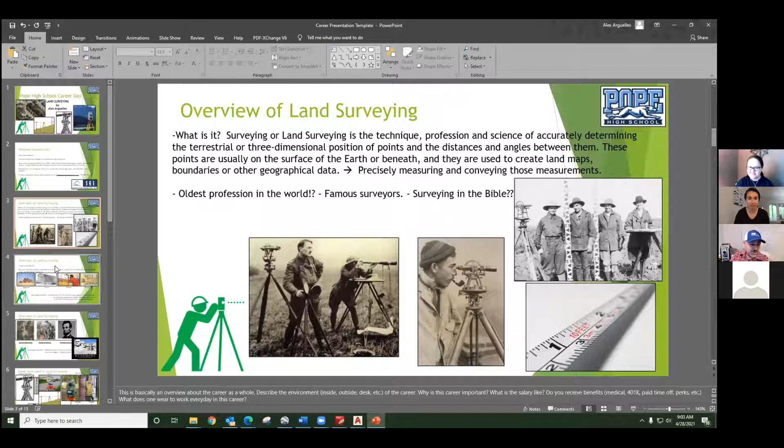So a few things about land surveying. We would consider it the oldest profession in the world, and of course there's going to be debate about that, but we'll stand by that. I'm going to share a little bit about a few famous surveyors, and then something about surveying in the Bible, believe it or not. So yes, land surveying is the oldest profession. We know many past civilizations have used it, everything from the pyramids to great structures from the Greeks and others.

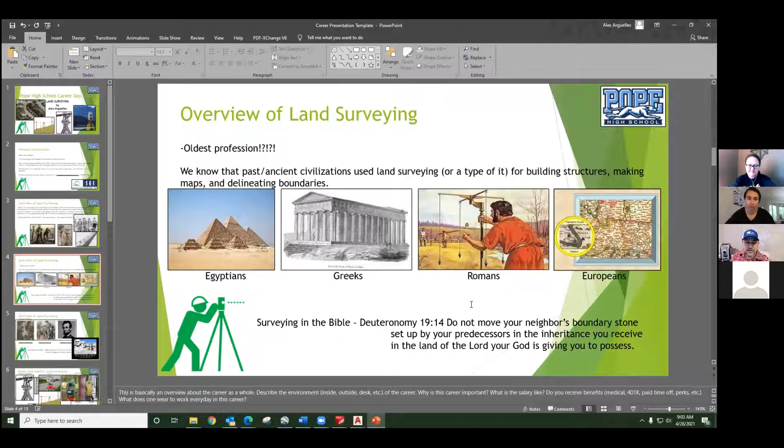And then surveying in the Bible: 'Do not move your neighbor's boundary stone set up by your predecessors in the inheritance you receive in the land the Lord your God is giving you to possess.' So land surveying has been around for a really long time.

Another verse from the Bible: 'Cursed is he who moves his neighbor's boundary stone.' So again, the word surveying is not in the Bible, but it's understood that there were properties, that there were boundaries, and that they found it important not to mess with those things. Even nowadays it's the same thing - when you have a property owned by somebody, you would not want anybody moving your property corner over, causing you to lose area.

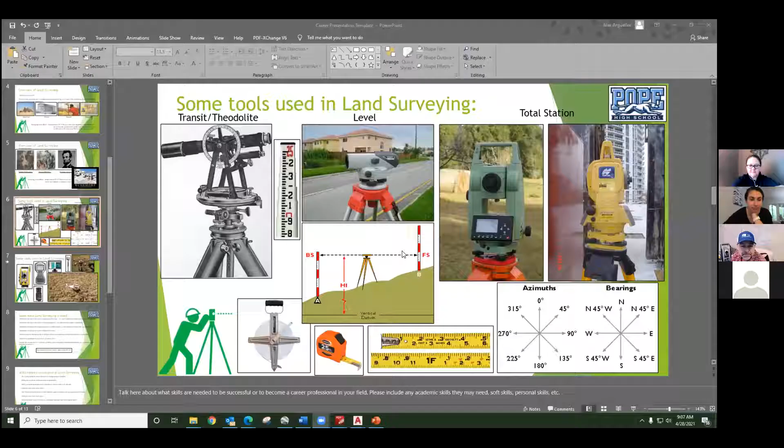But you describe the shot that you're taking. So I could be taking the center of a manhole. I could be taking the edge of pavement. I could be taking the edge of a driveway. Each of those things, as I'm shooting them and locating their location, if I put the right description, then later when I come into the office and I download the information, I can create a map, and it's really easy. It creates a sketch of everything that I'm locating, and I'll show you that in a bit.

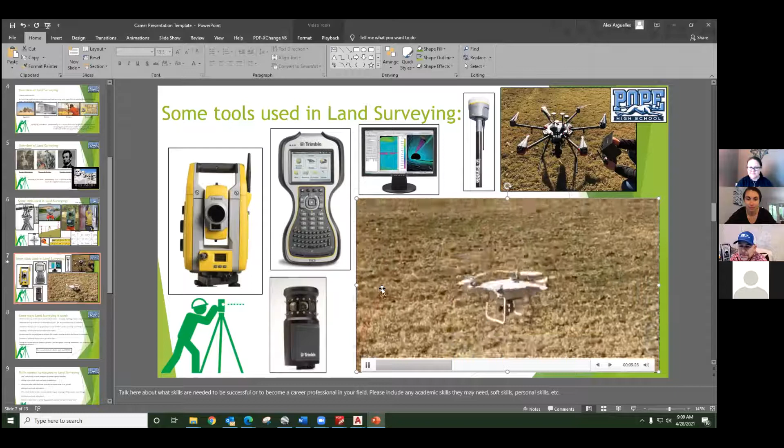Nowadays, we also use drones a lot. The drones that we use are for various purposes. The one that you're seeing there in the video, it's a drone for photography. So that one will take aerial photography, and then we can bring it into our drawing, and we can have a background of it. And again, I'll show you that in a bit.

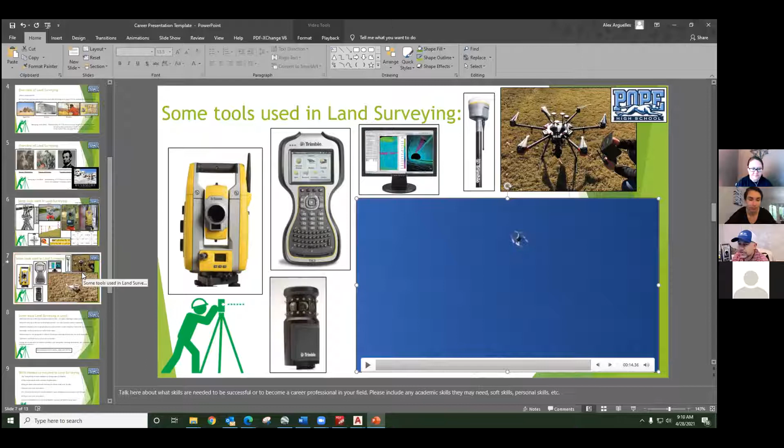This other drone here has a LiDAR unit. LiDAR is laser and light that shoots down to the earth, and you can get the topography of the earth. And again, I'll show you that in a bit. But as you can see, we've come a long way in land surveying, and technology is a huge part of it.

Usually land surveyors are the first ones to step on a site. We'll go through wooded areas and gain information about the lay of the land, where there's creeks, ditches, lakes, other structures, old structures. We have to locate all of that and show it, so that when there's going to be development or somebody's going to buy the land, they know what's in it.

We determine the lay of the land in developed sectors. For example, if you want to add an addition to your house, you need to know where the boundaries are and what the county permits, how far the county will allow you to build. Or if there's a subdivision already built but they want to expand into an undeveloped area, we go in there and locate all that information.

We delineate boundary lines, graphically or written, to define private property, easements, and other areas. If you own your own home, that is your private property, and it'll usually have pins at the edges of the property. You connect those pins by invisible lines, and that defines your property. We do a lot of boundary surveys, which is a clear delineation between you and your neighbor, and you and the public right-of-way. Usually cities and counties own the road. I'll explain easements in a moment.

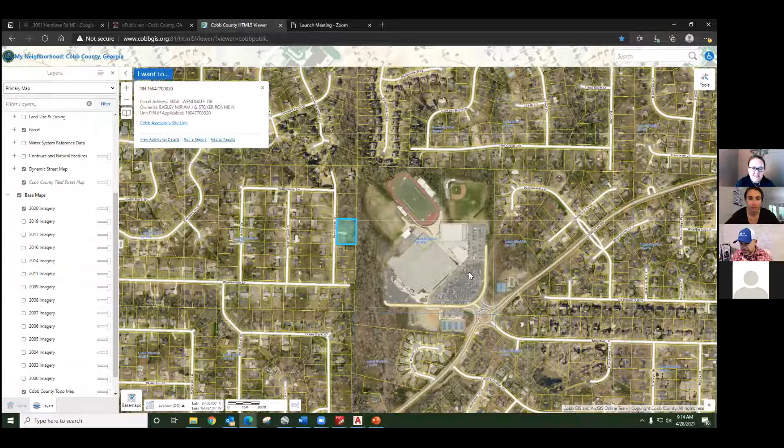The way the land system is divided in Georgia is called land lots. Imagine huge squares, then smaller squares, then smaller squares—that's how we define the location of something. For example, your school is located in land lot 476 of the 16th district of the 2nd section in Cobb County, Georgia. So this is land lot 476, this is the district, and a much bigger square would be the 2nd section.

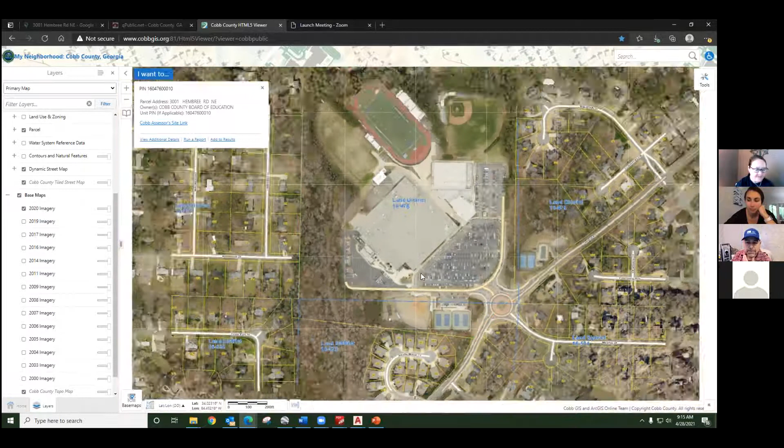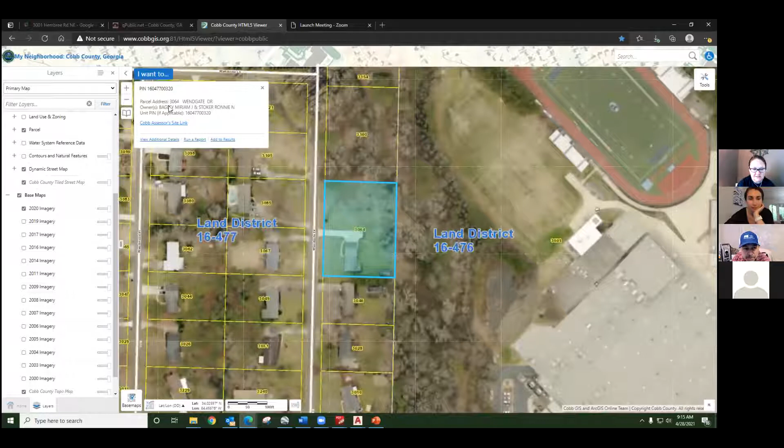What you see there in blue is pretty much the boundary of your school. As you can see, it falls in land lot 476, part of it falls in land lot 532, and part of it falls in land lot 533. This is important because this property is owned by Cobb County Board of Education. But next door, this house, for example, is owned by another individual. This is all public information, by the way.

With a little bit of research, you can find documentation that says who owns it, when it was purchased, and often you can find metes and bounds, or you can find a plat.

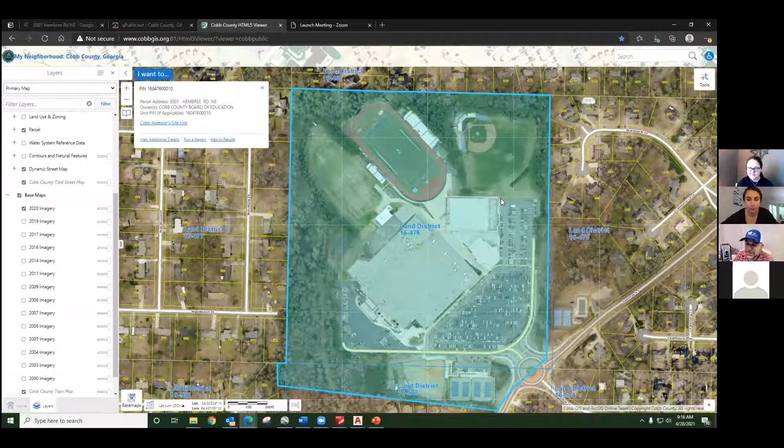Let me explain what metes and bounds are. If I were to describe this property, maybe I start over at this corner and describe a certain bearing and distance. Then I describe another bearing and distance all the way around and make sure that there's closure. That would be a metes and bounds description of your school property.

Also, of course, there's plats. Plats are like maps, so it's more of a visual sketch, and I will be showing you that.

So here, let's share this. This is the entrance to your school. And this specific plan, or sketch, that you see here is an egress, ingress, easement.

So what that means is that when a utility gets permission from a private property, which in this case is your school, T-Mobile South got permission to have an easement to have access into your school. The easement is described here, what you see hatched. So it's graphically described, but there's also a legal description.

As I told you before, this is where your school falls, and you can start the legal description. Again, legal description is simply telling you in word instead of in sketch, the description of an area.

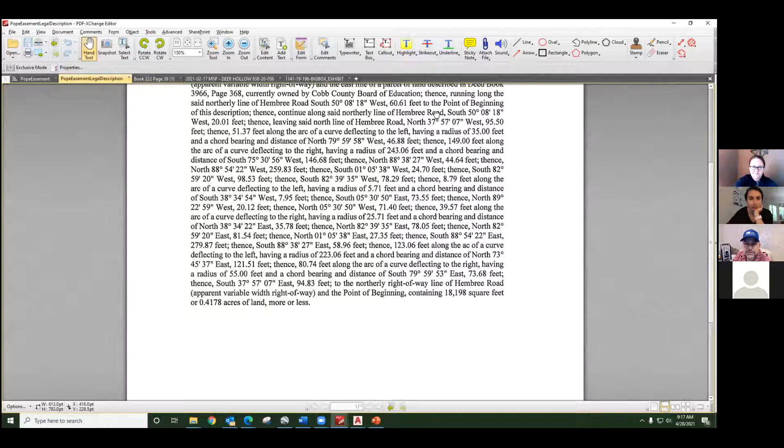So this description starts telling you where things are written, like a deed book and page, who owns it, so Cobb County Board of Education, and it starts describing it: northerly line of Hembree Road.

I'm not going to go through all of this because it would bore you to death, but this is a point of beginning. POB stands for point of beginning. And you have a bearing, and then you have a distance.

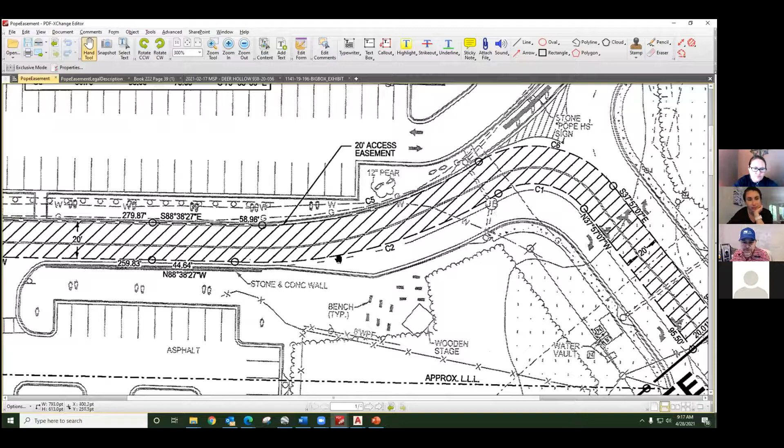So what they did is they started here, went here, and just described each of these calls. The curves are here in this curve table. So each of these calls - and you might be asking, well, okay, so why do we have an easement in our school?

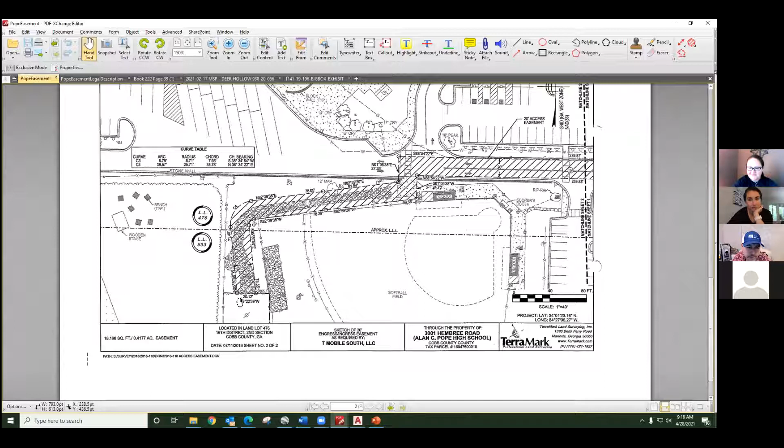If we go over here, you'll notice that the easement goes down the road, and then it goes in next to the baseball field, or one of the baseball fields, because I think you guys have two baseball fields. And then it ends here. So let's look at that real quick.

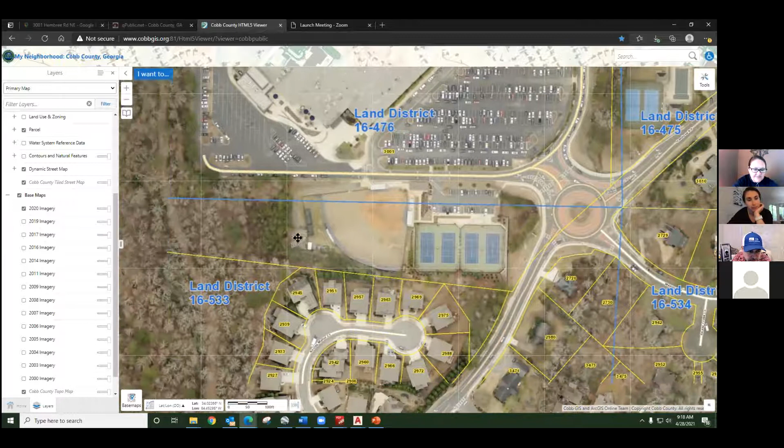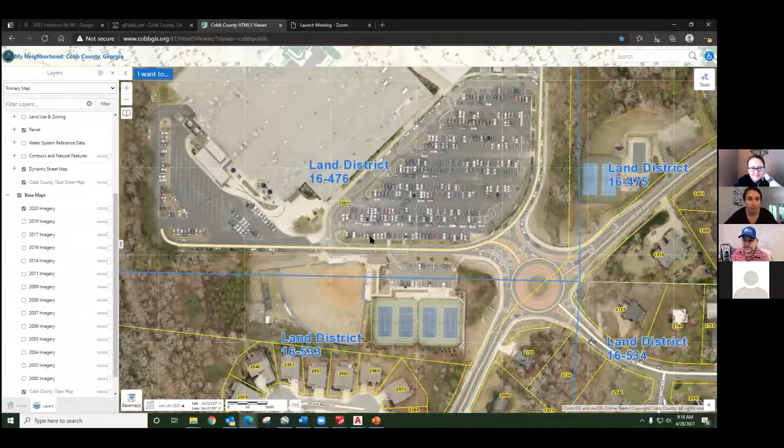So really what the easement is showing is going into the school, going down this path here, and leading over to this tower. So I'm guessing that T-Mobile has some kind of permission to access this tower, maintain this tower. So that's what an easement is. An easement is allowing a utility to go into a property for a certain purpose.

Let me stop sharing for a second. We use different things - so we'll have a metal pin on the ground. Let's say my pen is a metal pin, and we use a cap. The cap has a number that identifies the surveyor that set it.

Sometimes we use things that are a little bit more permanent. This is a brass disc. Dig a hole, put some concrete, put the brass disc, and it's located right in the center, so we have coordinates and elevations on it.

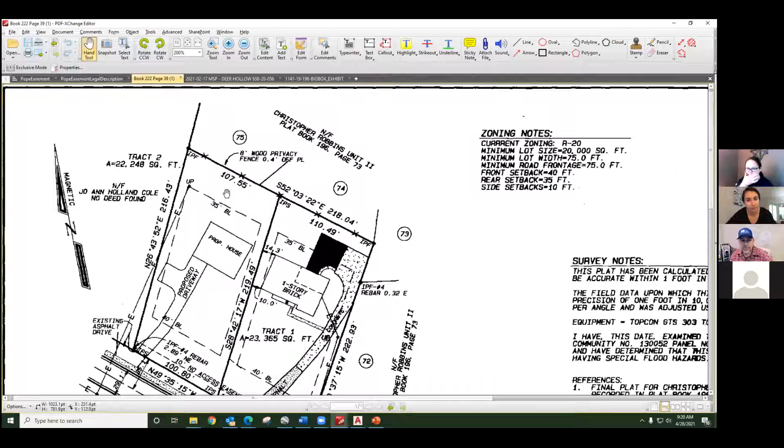Something else of interest, for example in Cobb County, in this specific area, is that dashed line that says 35 BL, 40 BL. I think it's 10 on the sides. That's the building line or setback line. What that means is per county ordinances, you cannot build past that. They do that for certain reasons, maybe they don't want you too close to your neighbor, and obviously they don't want you too close to the road. Different counties have different rules.

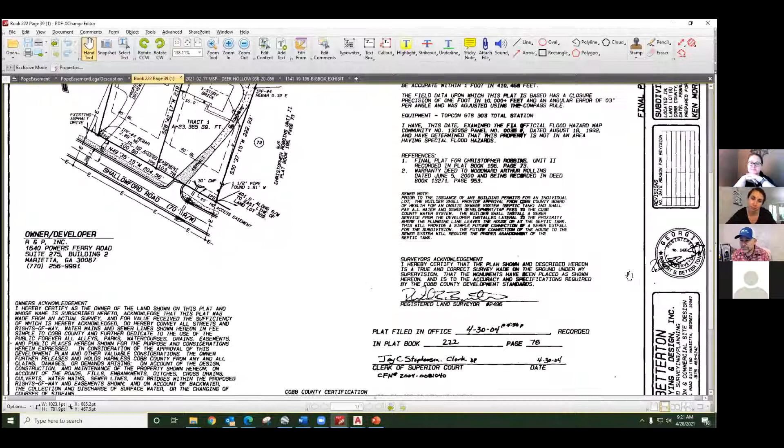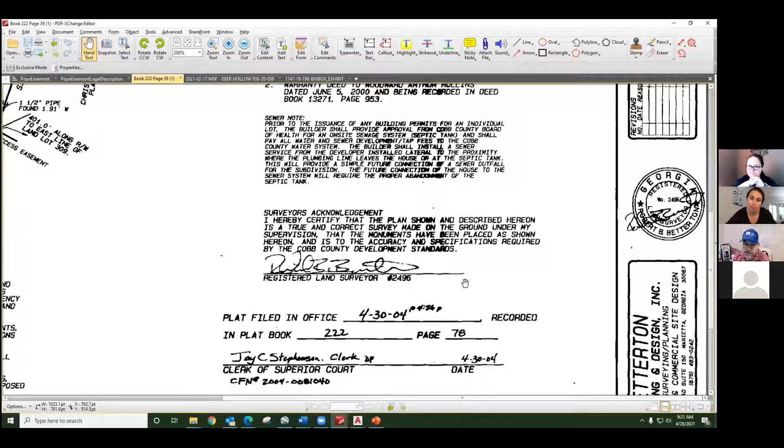But this is a typical survey. It shows a north arrow, a scale, a location map, and some information. When you're a surveyor - I am not a licensed surveyor - but when you're a licensed surveyor, part of your responsibilities is to sign and seal documents like these. So you've gone through a certain education or experience, you've taken certain tests, and that makes you a licensed surveyor.

Licensed surveyors and engineers are very much alike. We're just a little bit rougher around the edges, let's just say that.

This is another example of a survey, this one for a proposed development. So again, we have various parcels or lots. If you can see the grayed out area, that means this parcel used to be subdivided like that - that's the original lot lines, but they've made some changes. And again, we show information such as the right of way and the width of the right of way.

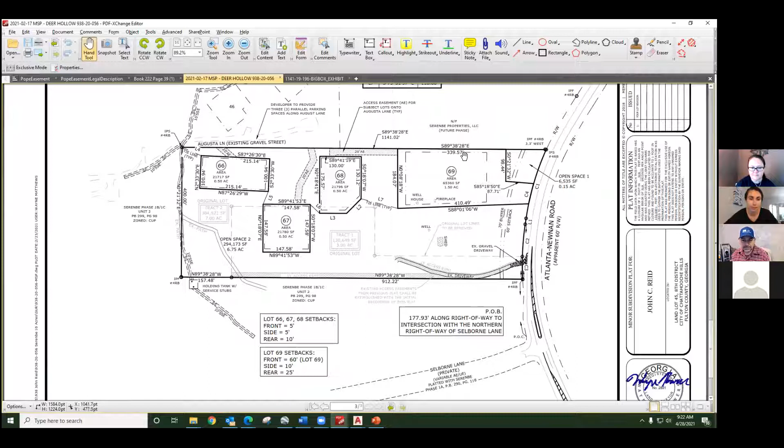And then again, angles and distances, or bearings and distances everywhere, to be able to know where on earth, where in the state of Georgia, and where in whatever county this falls in - everything coming closer and closer together, so that 20 years from now, 50 years from now, somebody can come and retrace this survey and actually be able to find the pins that were put in the ground.

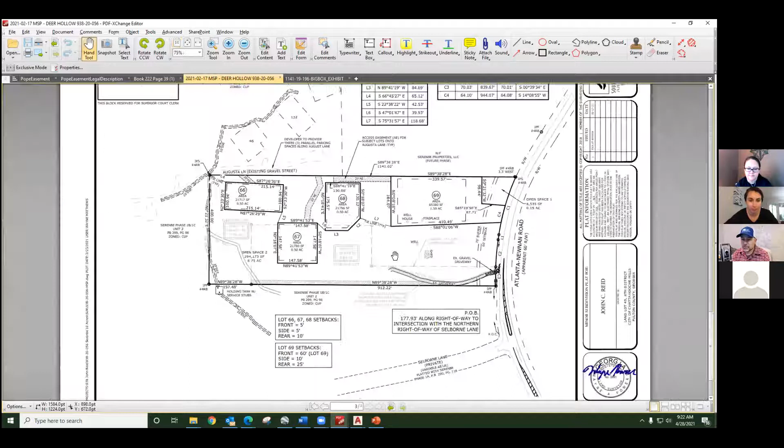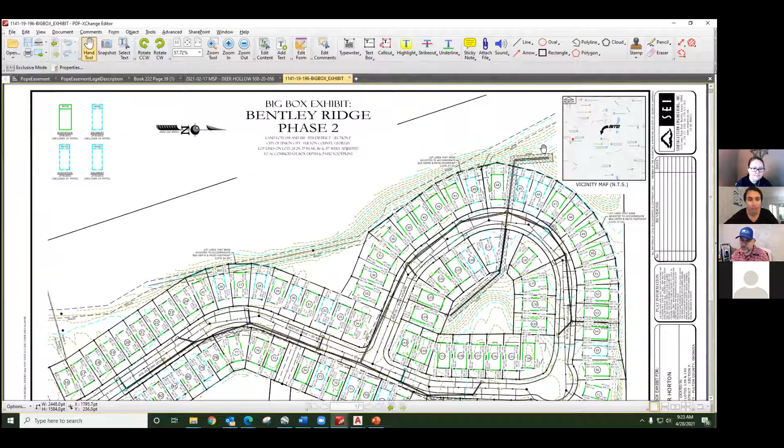So again, it's all about measuring, it's all about being exact. This is another example, a development not yet constructed. They have various sizes of lots and they fit them in here. Of course, these are contour lines, and they show what the land is doing. Those are very important because we can't look at things only in a 2D sense - we need to look at it in a 3D sense and figure out how things will fit.

All right, let's get to a little bit funner stuff. I'm going to share a little bit of CAD. CAD stands for computer aided design, and this is what I work on most of the time.

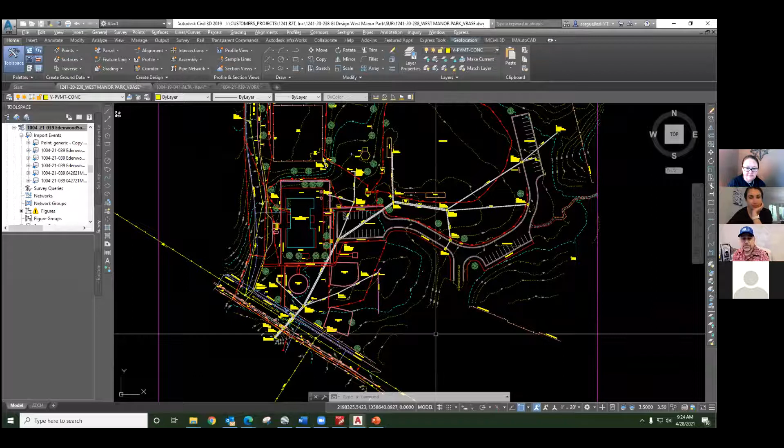This is an example of a job in downtown Atlanta. Let me bring up the image. So it's a park. It has a playground, a building, a baseball field, some parking lot. Some of it is covered by trees, and tennis courts.

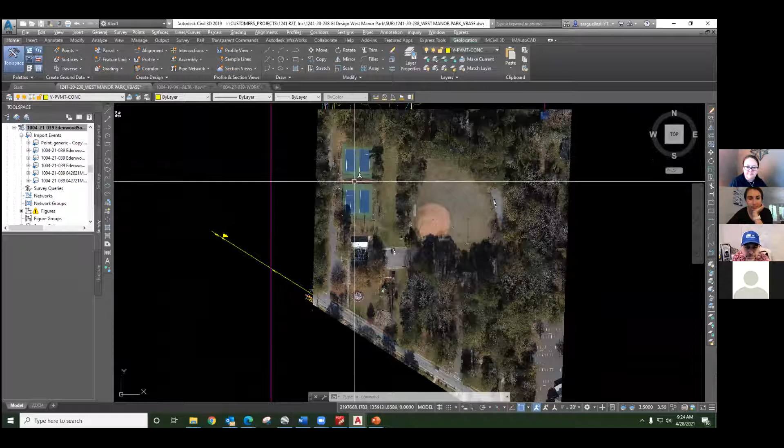So we had to go out there, and using the drone, we shot a lot of the topography. Topography means what the land is doing, elevation-wise. And then, through conventional surveying terms, we went down there and located some things - again, with the instrument I showed you earlier.

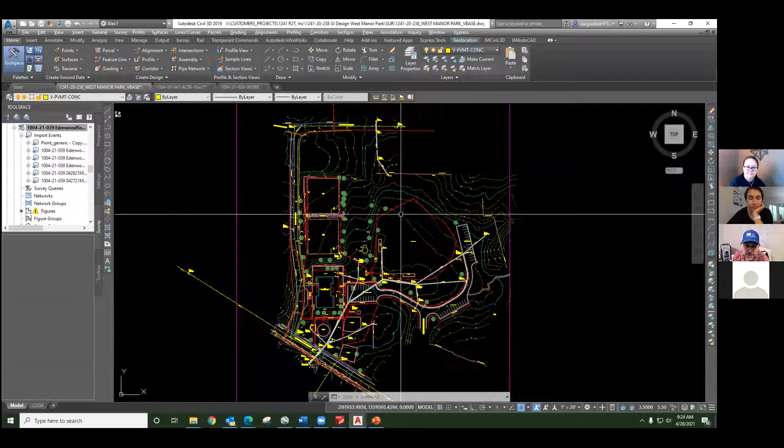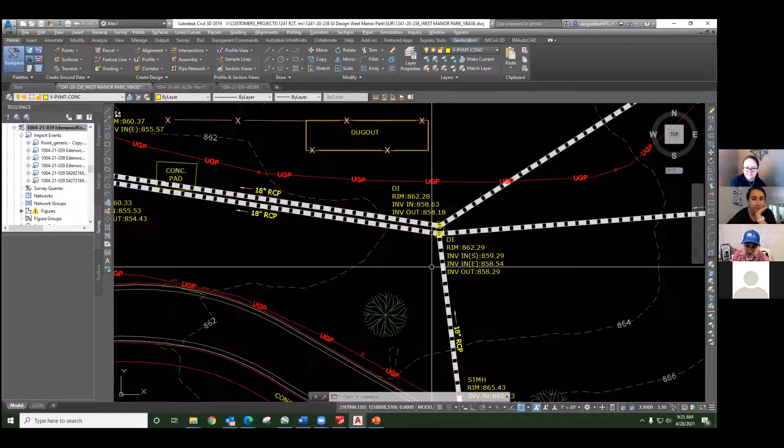Let me just point out some things real quick. These are contour lines, they have elevations, so as you can see, things are running a specific way. What you see, these thick lines, is storm sewer. Something important to note is all the contour lines push the water into the structures that then go underground and take the water away. And that's very important everywhere - in your house, in your school, everywhere - because if not, we have flooding issues.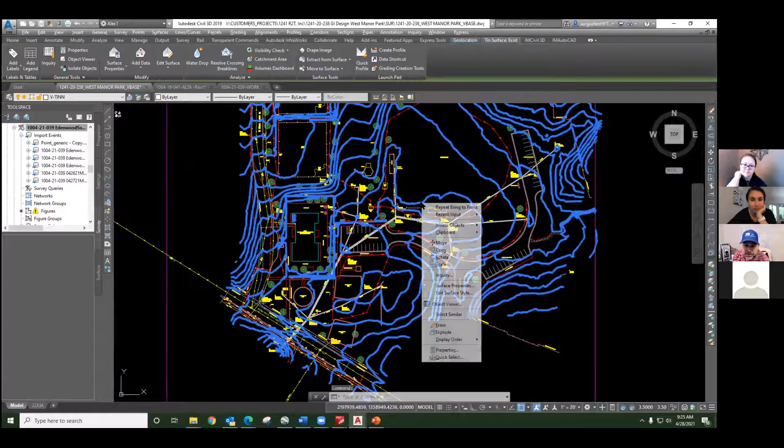So that's one way that surveying works a lot with utilities. At first, all these triangles - each of these corners has elevations. And when the drone flies it, it flies the area as a programmed flight. If you ever go see it, it's really neat - it just goes, turns, goes, turns, goes, turns. It does its own thing once it has its program flight set.

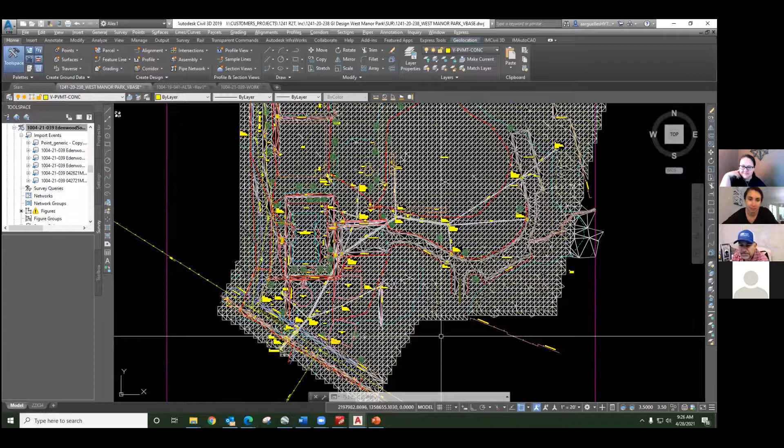Each of these triangles is what was collected with LiDAR, which is what I told you earlier - it's a light sensitive beam that goes from the drone and comes back, and it tells it the changes in elevation. From that, we were able to create the surface. And then, well, here.

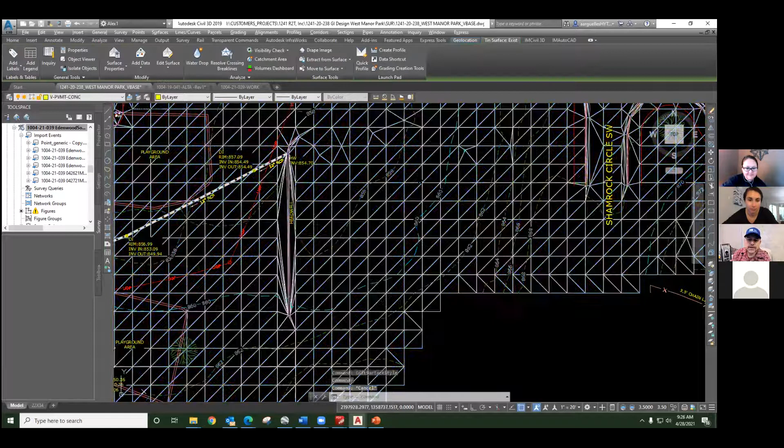Here I'm just showing the elevations. Again, what's lighter is lower, what's darker is at a higher elevation, and you can see the contour lines showing that.

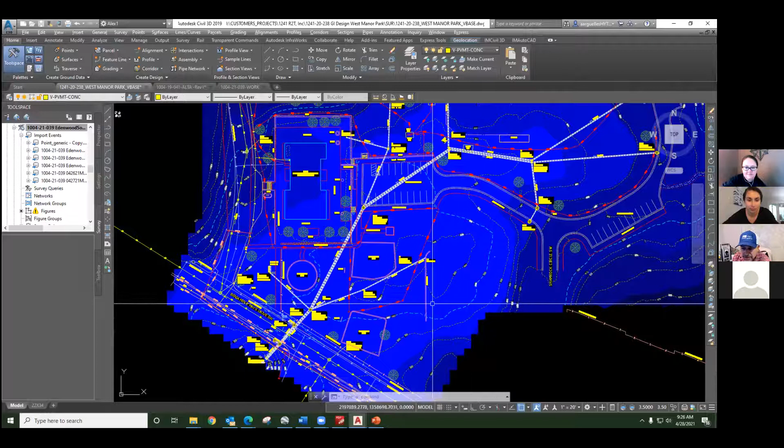So we have different tools, and we have other things, like I could turn on arrows and it would show you where the rain would go if it was raining, so you can see what it's doing without getting wet.

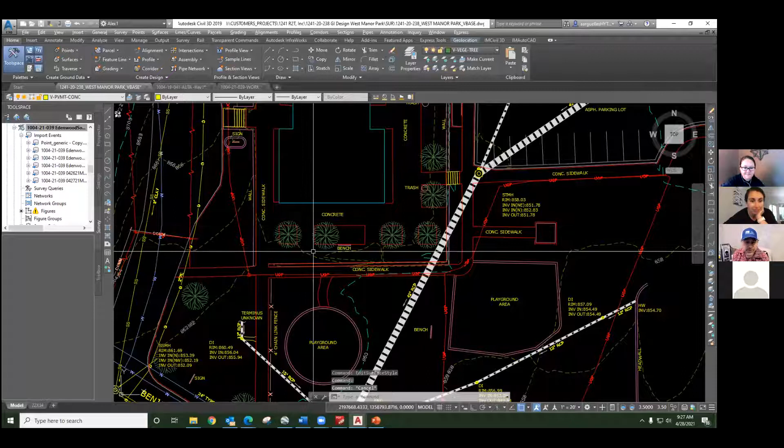But this is CAD, pretty much, computer-aided design. As they located trees, these blocks of trees come in. This is a building, so they located the corners, and if they coded correctly, it would literally draw the line around the building.

So I think that's it for CAD. Let's move on, because I think I'm running out of time.

So, skills needed to succeed in land surveying. One of the things I love about it is you will get to work outside or inside, depending on what you're doing. We have field crews that go outside and locate all that information I talked about earlier, and then we have people like me in the office that transfer that data and create plans.

I'm going to try to fly by this real quick. But anyway, if you work outside, in the field, you've got to work in any kind of weather, wet, hot, cold. I've worked in the snow before, and I used to work in Miami, horrible, super hot weather.

Knowing simple math and trigonometry is important. Nowadays everything's computerized, so don't worry, you don't have to sit there with tables, but if you want to be more than a button pusher, you definitely want to know your stuff.